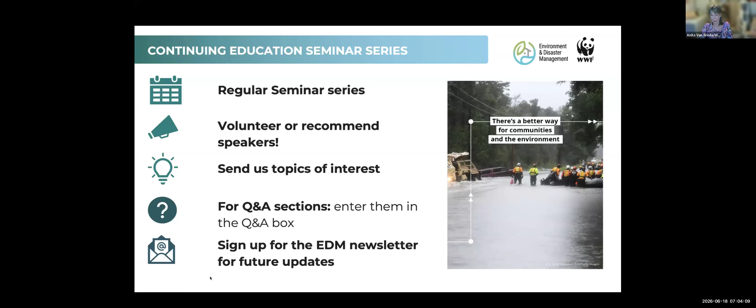For those of you not familiar with the Environment and Disaster Management Program at WWF, our goal is a simple one: reducing risk and vulnerability for people by working with nature instead of against it. We work at the intersection of disaster management, environmental management, and development, and place that work to the extent possible in climate mitigation as well as adaptation.

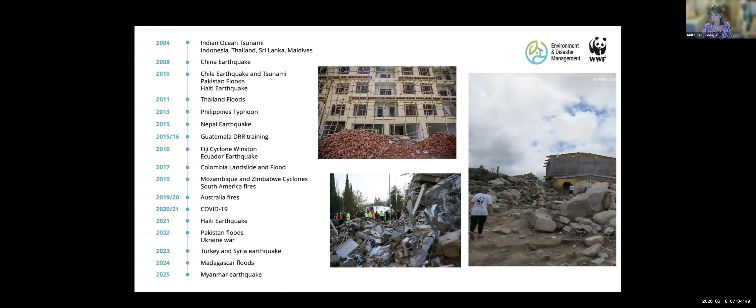We've been doing this work for over 20 years now, responding to various events around the world, and we use our tools and techniques to support recovery and reconstruction as well as risk reduction.

Our work is organized primarily into three work streams: our green recovery and risk reduction program, our nature-based flood management program, and our infrastructure work, where the building materials that we're talking about today is focused.

Most of our tools are free and open source and available in multiple languages, and we do provide training to support the use of those tools.

This work that we're talking about today was born out of the 2015 Nepal earthquake, where my colleague Missaka worked with colleagues in Nepal to develop the Building Material Environmental Guide, or BMEG. A few years later, we worked with Northwestern University School of Engineering to expand that guide. There have been a few local versions developed for specific countries, and that has led us to this call to action report we're sharing with you today.

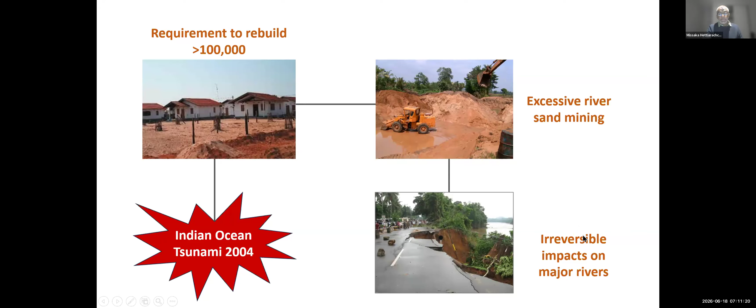This trend was not limited to Sri Lanka. It is continuing in all the major disaster aftermaths, regardless of whether they are in the global north or the global south. For instance, if you take the Turkey-Syria earthquake in 2023, where 164,000 buildings were damaged, but a record volume of 100 million cubic meters of debris was generated. To put it in perspective, that is 40 times the size or volume of the largest of the Great Pyramids of Giza.

In Nepal, for instance, the 2015 Nepal earthquake, the reconstruction required over 1 billion clay bricks. And again, to put it in perspective, if we lay those bricks in a single line, it would traverse the Earth's circumference 6 times.

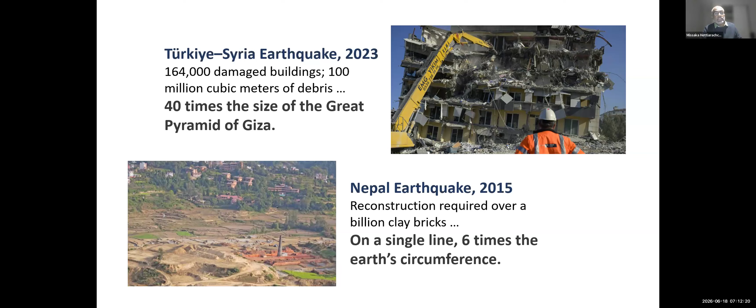Now, what makes the situation worse is that even in a non-disaster context, the construction industry causes a mind-boggling level of environmental and social impact. Some of those impacts and requirements for the construction industry are given in numbers here. It consumes over 40% of the total energy use or energy generation of the world, and emits nearly 40% of the greenhouse gas emissions from all the manufacturing and industry related outputs of the world.

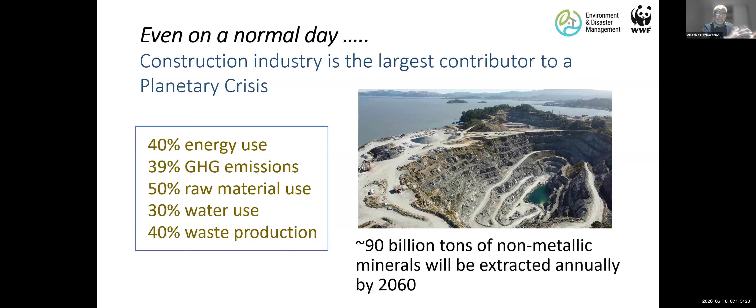And by 2060, it will actually extract over 90 billion tons of non-metallic minerals, especially used in the construction industry.

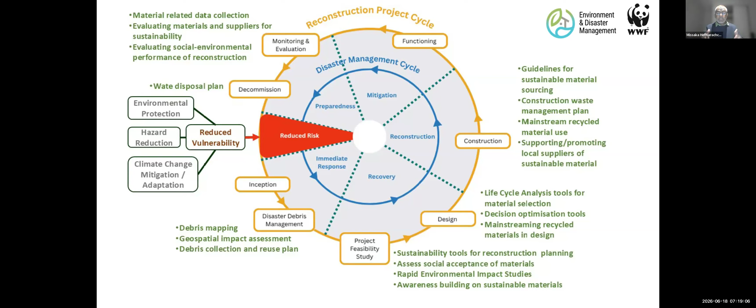So how to address these issues? Number one, these are nuanced issues, and they have to be addressed in their particular context, placed very carefully across the disaster management cycle and the construction project management cycle, because these issues are equally distributed through these cycles as well.

Finally, although the potential management interventions could be very diverse and have to be executed in a nuanced approach, we could narrow down the potential approaches to four major strategic recommendations.

First, integrate sustainable materials management into disaster recovery policy, including the future UNDRR policy frameworks. Second, elevate sustainable material use as a key performance indicator for reconstruction projects, such as including them in the Sphere Handbook and other guidelines of humanitarian agencies.

Third, develop construction sector preparedness guidelines through global regulators such as FIDIC and Global ABC. There are some very rudimentary initiatives, but they have to be taken much further and advanced. Finally, establish a global hub for post-disaster management of building materials at a suitable institutional home, for example the Global Shelter Cluster. Of course, the name of the cluster has changed now, but you get the idea.

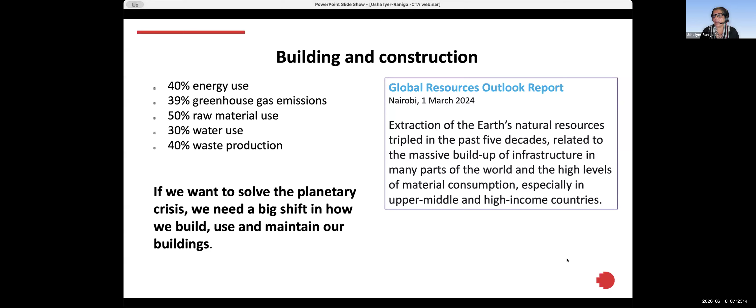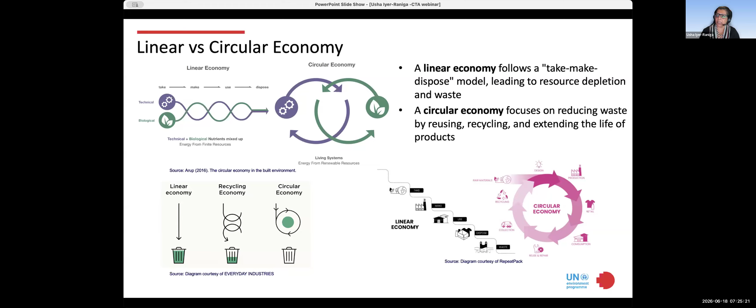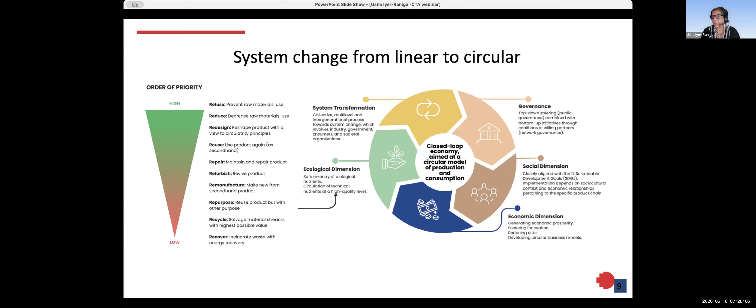But in a disaster situation, and depending on what the disastrous situation is, you may have opportunities to reuse building materials, but there are social dimensions also that need to be considered. For instance, taboos associated with the reuse of those materials. We also need to think about whether the materials are clean enough to be used, thinking about it from the perspective of toxic materials or chemical impacts that may arise out of the use of these materials.

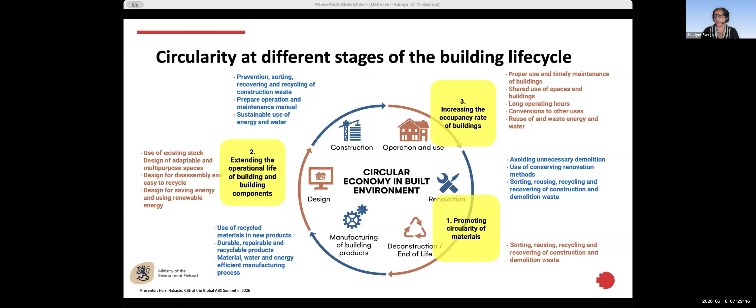The next slide, thanks. So what are some of the things that are happening at a global level that are getting us to start thinking in this area and to support more and more work in the sustainability and circularity space? This has happened through the building breakthroughs, starting with COP21 back in 2015, when buildings and the built environment became part of the agenda for the discussions.

And since then, a number of things have happened. An example provided here is the development of the building breakthroughs that was started at COP26 in Glasgow and then officially launched at COP28, looking at the priority action areas, which includes things like capacities and skill development, as well as creating a market in this space.

The next slide, thanks. Some of the work that we have been doing in this space has been looking at how do we support the development of a circular built environment, particularly in terms of the global south, because those are the regions that are being affected more and more with disasters.

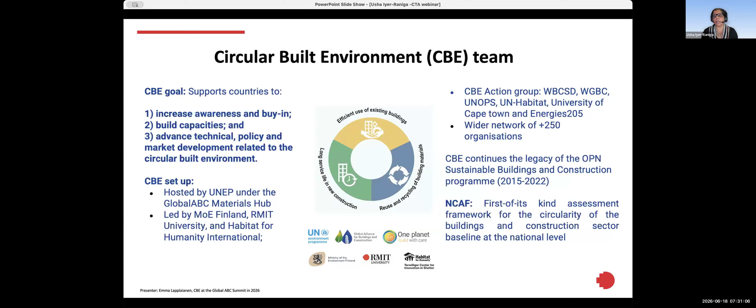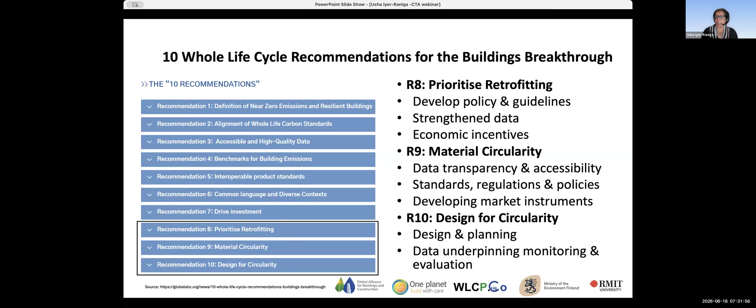The next slide, thanks. We looked at circularity recommendations, three of which were focusing exclusively on circularity: prioritizing retrofitting, looking at how can we close the loop with material circularity, and how do we design for circularity. Next slide, thanks.

So I want to focus a little bit. Can you take it to the next slide? I want to focus a little bit in ending on how policies make an impact. And there are two examples that I want to provide here.

And I'll leave it there. Thanks, over to you, Anita.

We've heard around the policies, we've heard around the initiatives to handle these building materials better. And to support that process, I want to share a bit about some of the practical elements of working with this building materials crisis. So I think it's important to understand the scale.

It goes beyond the capacity to remove with the resources that local communities have. There's also a real challenge when you come into scale around where to start, because obviously some of these situations require 3, 5, 7, 10 years of effort. But where do you prioritize starting working with the building materials that are there? So prioritization is also a key factor.

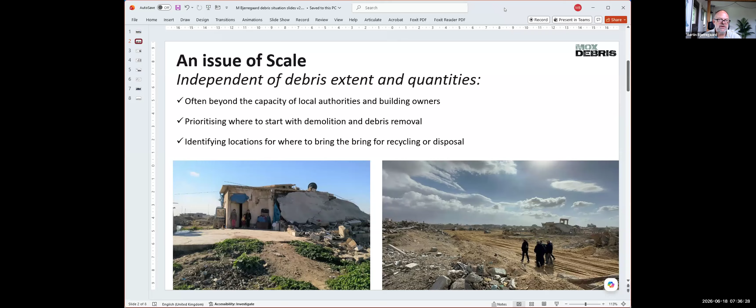Now, within the building materials, we can call them debris, we can call them rubble. There are certain risks to managing it. If we're not managing these building materials properly, because they contain hazards such as heavy metals, oils, chemicals, physical hazards as well from reinforcement bars, we have human health risks. This is an everyday occurrence. If you talk to families, their children are in the streets and they are coming home with scratches, with cuts that can get infected. And we also have other chemicals within the debris.

The debris and the rubble prevents access. So those returning to their homes, those returning to their communities after the disaster or the conflict, they can't get to some of the critical services. They can't get to the hospitals. They can't get to the water stations because of the debris creating barriers. And critical services can't get through. You can't start recovery in a community if you still have debris lying everywhere.

Now, if there's uncontrolled dumping, as we heard from Missaka and Usha before as well, we're having huge environmental negative impacts and liabilities from dumping this debris out into nature. And sometimes this happens on agricultural land. After the tsunami in Banda Aceh, we had to spend millions of dollars moving debris again because it was placed on shrimp farms and agricultural land in the haste of debris removal. So you are impacting on economic land value as well.

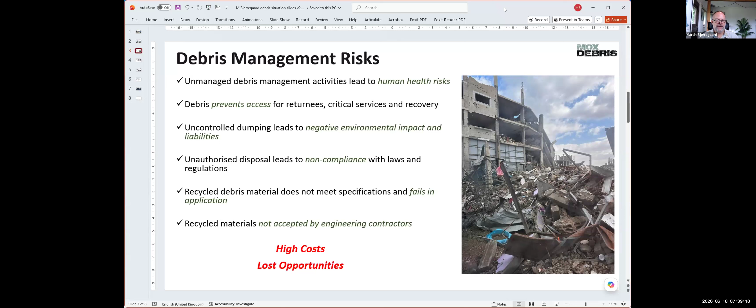They are huge costs. Debris management is a huge cost to recovery. And if we don't attend to it properly, we're losing huge opportunities for not just cost reduction, but climate, environmental, social, and human benefits as well that can arise.

Let's look at some of the hazards in the debris. Now, this is a bit scary maybe, but there are procedures, guidance, experience on how to manage all of these hazards. It's been developed over the last couple of decades at least. So yes, there are hazards.

There's asbestos in a lot of the debris, in Gaza, in Ukraine, and other places as well. After conflicts, you'll have explosive ordnance. You will have hazardous wastes and substances. That can be anything from under the sink in the kitchen, chemicals, bleaches. It can be from the local workshops. It can be from industrial processes as well, industrial hazardous chemicals.

We also have human remains. It requires a dignified approach. There are procedures for managing that.

You'll find snakes, scorpions, vermin within the debris. In Gaza at the moment, we have huge concerns around vermin. Rats are living in the debris as habitats and coming out and even attacking humans in the camps. A huge habitat for vermin and scorpions and snakes is in the debris.

Structural instability with walls collapsed and buildings unstable, meaning that any sort of vibration or even any later tremors can lead to further collapse. And then solid waste.

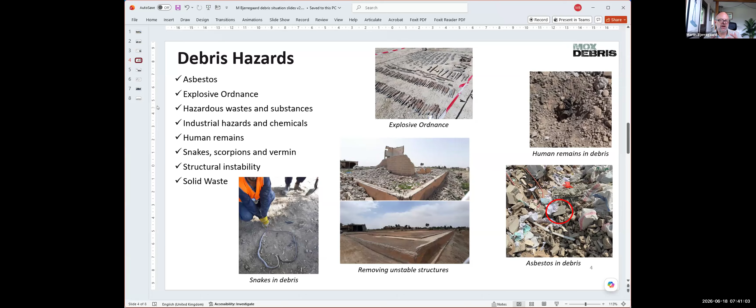So solid waste - if you are a community that's been struck by a disaster, you see a pile of debris, you don't know it's debris, you think it's waste, you'll put your own household solid waste on top of it. It's normal, it's understandable. But once we start mixing solid waste with building materials, it again becomes very difficult to handle, to recycle, and to make the most of it.

So I wanted to share two examples, current examples. Firstly is Ukraine. Latest studies from UNDP estimate around 11 to 12 million tons of debris across Ukraine. On a personal note, I think it's higher, but it's difficult at such a scale across such a large region to estimate. But we're into the 11 to 12 million tons of debris at least. Now, key to Ukraine, very popular to use asbestos in the roofing cement, roofing sheets. More than 70% of buildings in Ukraine have asbestos in their construction building materials. So the debris - you could extrapolate 70% of that 11 million tons will also have asbestos in it. A huge challenge for a country that was using asbestos all the way up to only like 2 or 3 years ago, and where asbestos is not considered a risk because it's not on the profile.

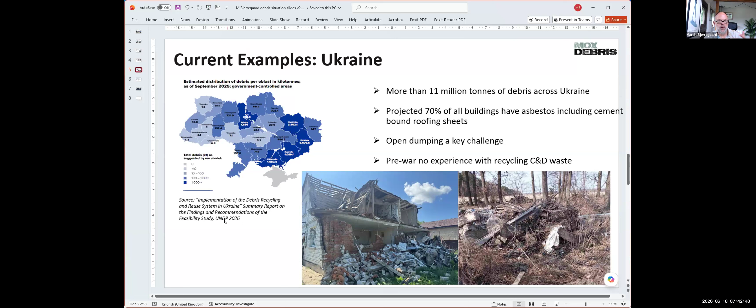Open dumping is also a challenge, obviously, as you're trying to rebuild. There isn't the space, there isn't the facilities set up. They are starting to be, but not set up to receive this building material. And one of the key understandings for this is that Ukraine did not have any C&D, construction demolition waste, recycling or management systems before the invasion. So there was no experience with recycling C&D waste or building materials. That means we are working in an environment where there's a whole awareness raising and upskilling for debris, rubble, building materials management where there wasn't any before.

Another current example is in Gaza, nearly 60 million tons of debris. Now, Gaza is a very small place, and 60 million tons is unprecedented - it's globally unprecedented on such a small location. There's also limited plants, machinery, trucks, oil, engine oil. Just listening this morning with some colleagues in Gaza, the cost of engine oil at the moment is $700 to $800 per litre. You need the engine oil for your trucks, for your loaders, and for your excavators to move the building material. So you see, we're talking about building material management, but if we haven't got the oil or the fuel and we don't have the plant and machinery, there's not much we can do with the building material as a management strategy.

So limited plants, machinery, trucks, everything in Gaza, and there's no land to place this debris on for storage in order to then come later and recycle it.

So you see, the building materials, if we don't move this debris, we can't get on with recovery. But if we can't move it anywhere, then there's no recovery.

It's one of those games where you have your squares as a kid. You remember moving your squares around and you had to get them into location.

We are really constrained in Gaza with building materials, and the quarries have run out as well, nearly. So this is a huge building materials challenge that we will be facing. And it's contaminated with explosive ordnance, hazardous waste, asbestos. And we also have, unfortunately, nearly 9,000 to 10,000 estimated human remains in the debris.

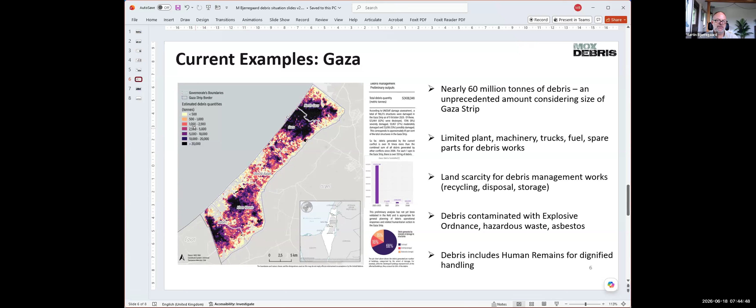So you can see we are globally faced with some huge building materials challenges. But again, back to the scale, these are the big ones. Building materials management after post-disaster or post-conflict is ongoing all around the world, to different levels, but it's still the challenge.

And that's comparing satellite imagery pre and post the event, confirming the damage with, for example, nighttime lights and airstrike locations, and then using the database of those buildings to estimate height and volume. And then you can start to calculate the debris based on the total floor area, square meters damaged from the satellite imagery analysis. So we are getting quite good at the debris estimate.

So when you see 57 million tons for Gaza, you see 11 million tons for Ukraine, the approach that has been taken to achieve those or to reach those estimations is getting more and more robust.

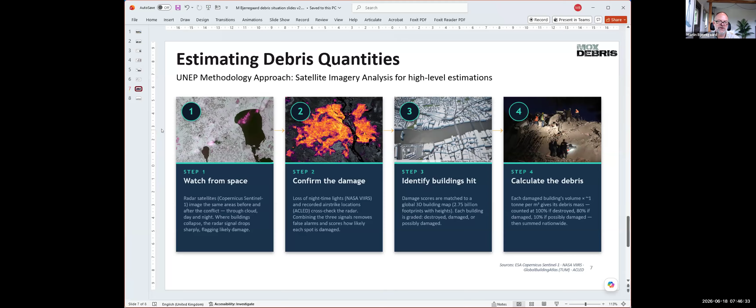So what I really wanted to put across today in this webinar is for you to appreciate the problems, the challenges, but also understand that there are solutions, that there is experience out there. And we're seeing it, for example, in the UNOPS document just developed, the UNDP documents, the World Bank guidance. There is more and more experience coming through and being channeled into this sphere. And that's what we need to start picking up on and operationalizing. And that's hopefully in the next couple of webinars as well. Thank you very much. Over.